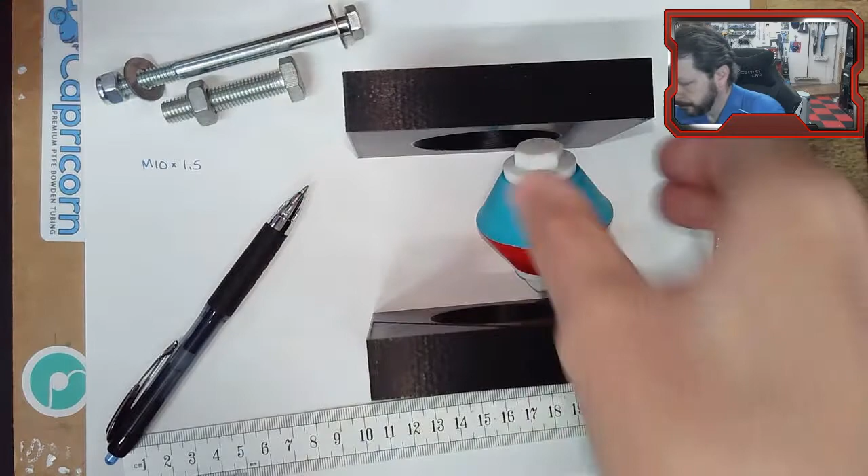Okay, we're going to do an example calculation for calculating the bolt and member stiffness of a bolted joint. We've got a model here of kind of what we're going to do. So we're going to have a top plate and a bottom plate.

This model is demonstrating the frusta that are in the clamped region of the bolted plates. So this is just showing the region that we're going to calculate the spring constant for of the plates themselves. It should also be noted that since these washers are in the grip of the bolt, there's the nut and there's the head, they too are part of this frusta. I just didn't really create the model that way, so this is sort of generalized.

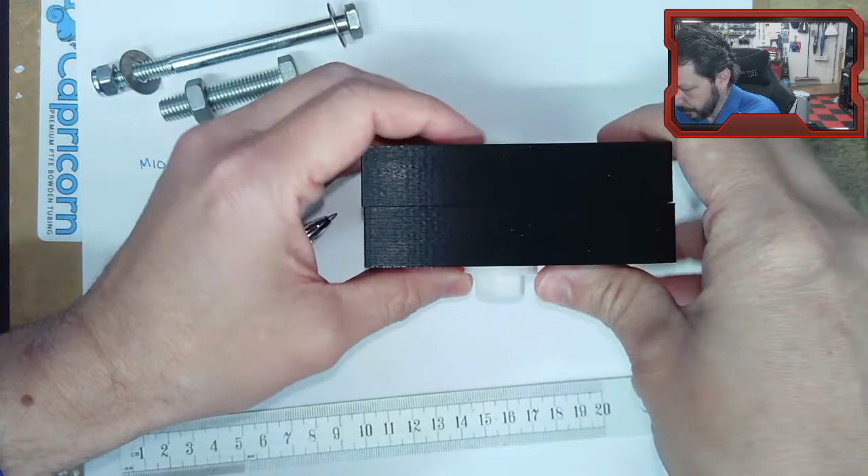So what we're going to do, let's talk about the dimensions of what we're going to model, and then let's go over to Mathcad and build this mathematical model to calculate this stiffness.

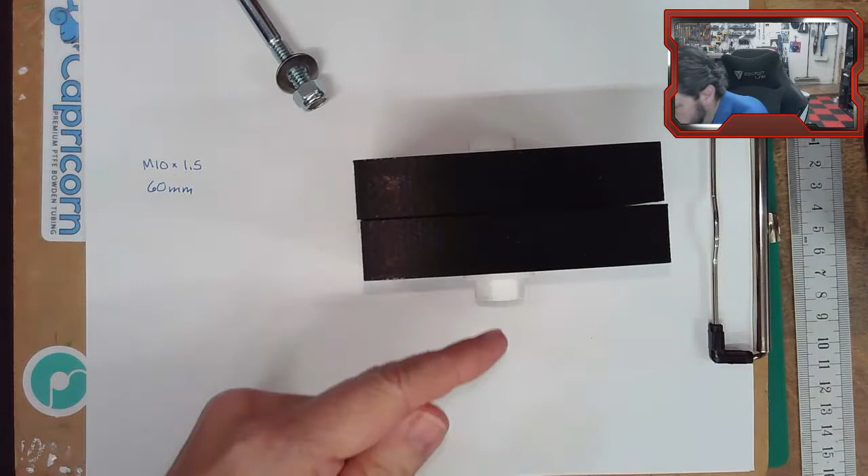I'm going to use a bolt like this one where there's an unthreaded region and a threaded region. Obviously this one's too long for this. What we're going to use is an M10 by 1.5, and it's going to need to be long enough to go through the washer, plate 1, plate 2, the washer on the back side, the nut, and then extend a little bit past the nut, 2 or 3 threads past the nut. If we just measure that total distance, it's going to have to be about 60 millimeters. So it'll be a 60 millimeter long fastener with a few millimeters of threads past the nut.

If you didn't have the physical things to measure, like we can go and measure this, then there are charts that show you the thickness of the various nuts. You can have thin or regular or oversized, so you can have different styles of nuts here that you can calculate, go look up the actual dimensions for.

Same thing for washers, so you could go look up all of those dimensions if you wanted to. We just have it here, so we're just going to measure it. The plates are going to be 20 millimeters thick each.

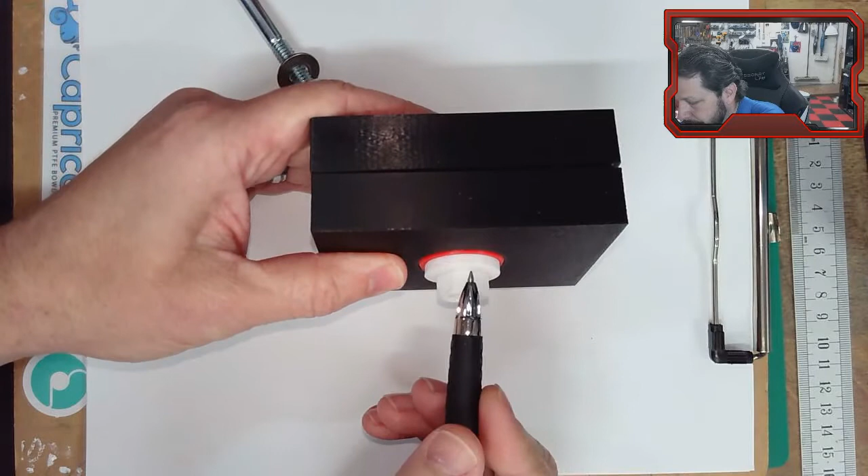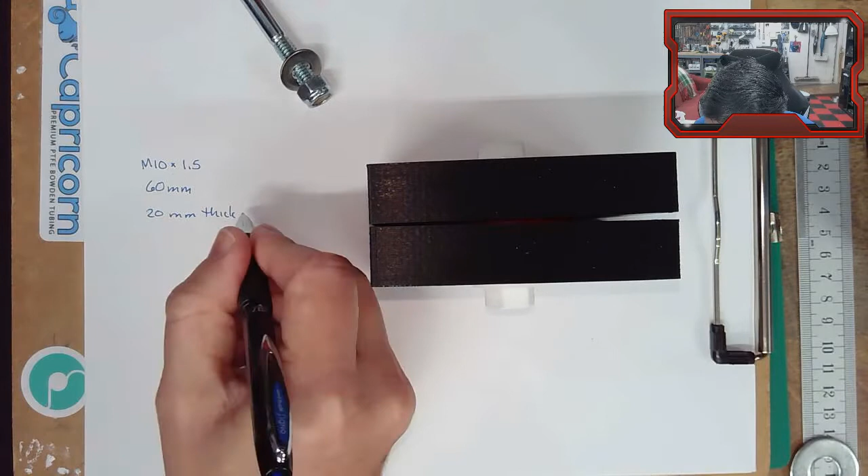And these are thick, oversized washers. I don't know if you can see them too well, but most washers are not nearly that thick. But for demo purposes, here's a big washer here, and it's not that thick at all, an actual real one. But this is 5 millimeters of washer, way more than you normally have, but that's what we're going to go with. So 5 millimeter thick washers.

We're going to go with the washers both being steel, and plate 1 up here, the top plate—kind of get some separation there—the top plate is going to be steel, and we'll make the bottom plate aluminum so that we can see how it affects having different materials.

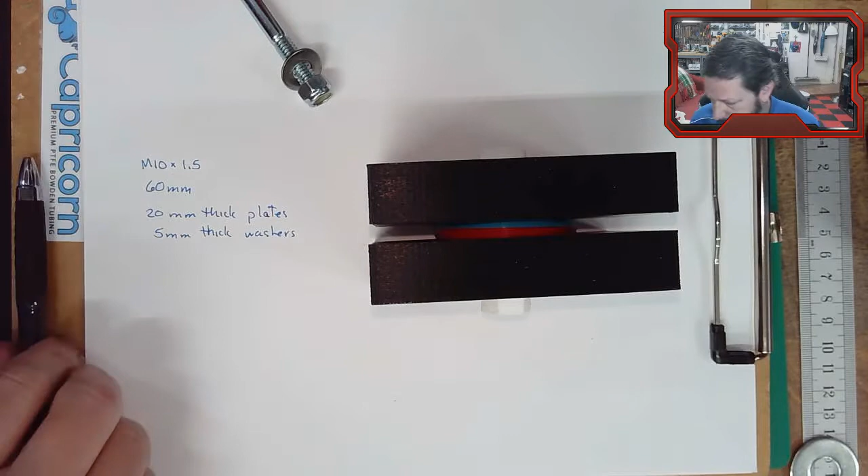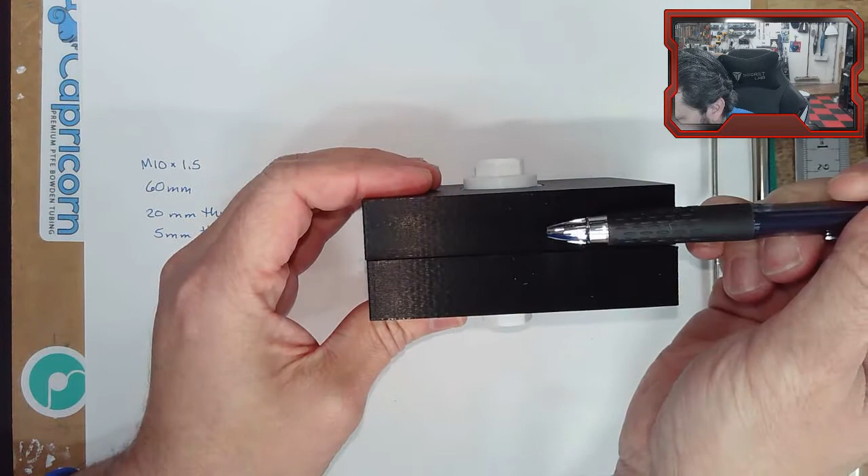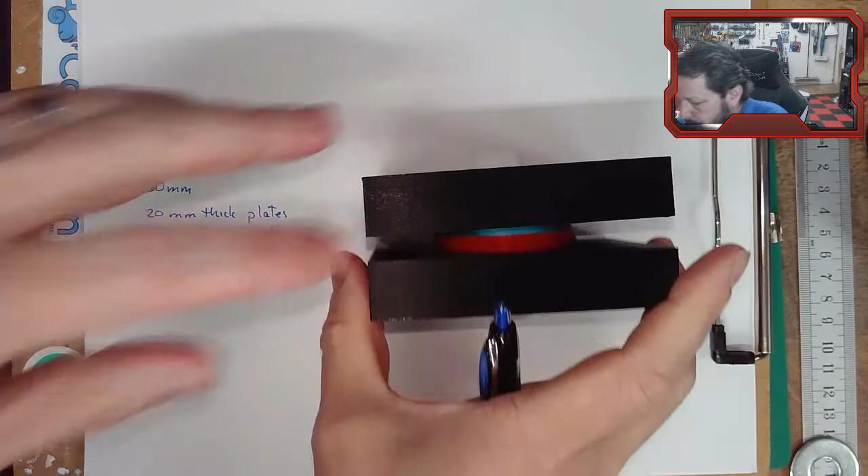So there is one little shortcut that we could take that I'm not going to take, just for the purposes of being a little more thorough on how we're going to do this. Since the steel washer on top and the steel plate are both steel, they have the same modulus of elasticity, and they're touching one another, so they could be part of, in this case, this blue frustum up here—frusta is the plural—they could be collapsed together into one thing of a thickness of 25 millimeters. So we could do that. I'm not going to, just so that we can do one particular calculation on how you get some of these dimensions when you can't do that, like when they're steel and aluminum, you can't mix those together because they're different materials.

Okay, let's go to Mathcad and calculate. First, let's do the bolt stiffness.

And here we've got the equation. Let me look up the actual equation number so you can reference it. This is in Shigley 10th edition. The equation number that we're going to be using is 8-17, so we'll write that down. There we go—well, that's going to actually do math, isn't it? We want to not do math right there, we just want equation 8-17. In 10th edition, that's on page 419.

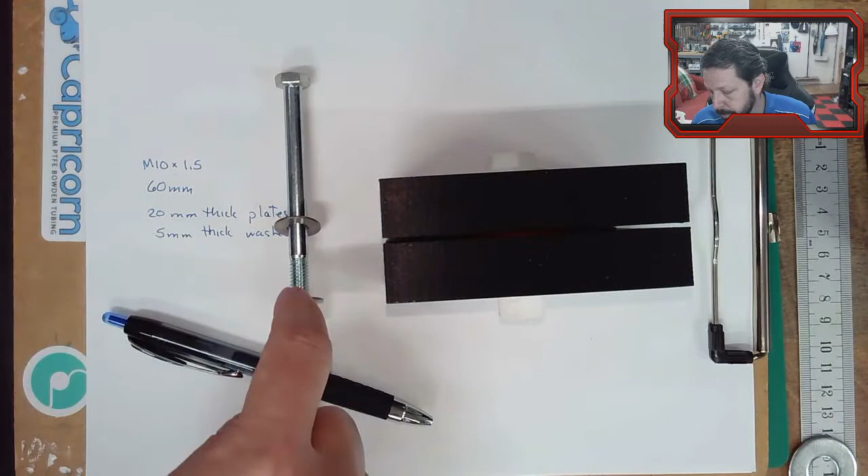This equation is going to need the area of the threaded region, and there's actually a couple of things we need to calculate. The bolt that's actually pictured here is fully threaded, but we're going to model a bolt that has an unthreaded portion and a threaded portion, so that it's more like this, just shorter.

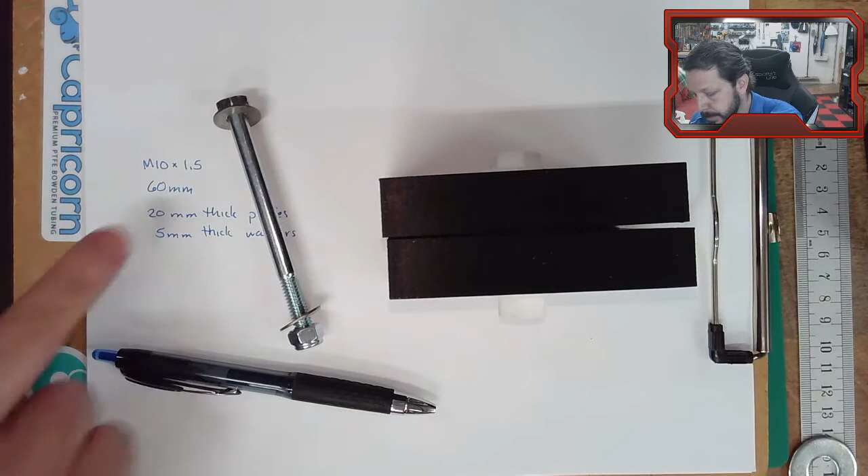We know the total length of the bolt is 60 millimeters. We just measured how far it needed to be. Again, these don't come in easily - they don't come in 62.28 millimeters, so you have to round out to the nearest larger size. If this thing actually measured to need to be 58 millimeters, there's probably not going to be a 58 millimeter bolt that's easy to find, so you round up to 60 millimeters, or the next round size.

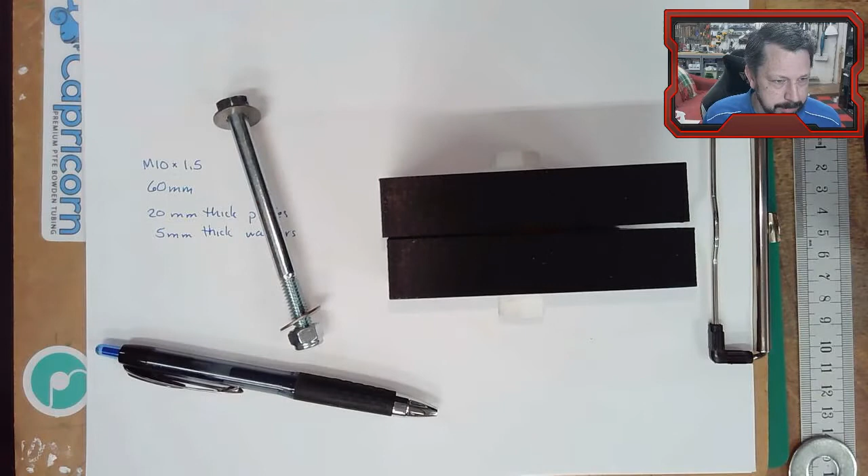In the back of your book on page 1043, there's a table, I think it's A17, that has lists of common sizes for various things. And 60 millimeters, that is a common size. So first, let's get some of these lengths of the threaded versus unthreaded regions.

Let's skip equation 817 for a little bit. L, the total length of the bolt, not including the head of the bolt, is 60 millimeters. And again, this is for an M10 by 1.5, so 10 millimeter diameter - D, lowercase d, is going to be 10 millimeters. We have the length of the threaded portion and the length of the unthreaded portion.

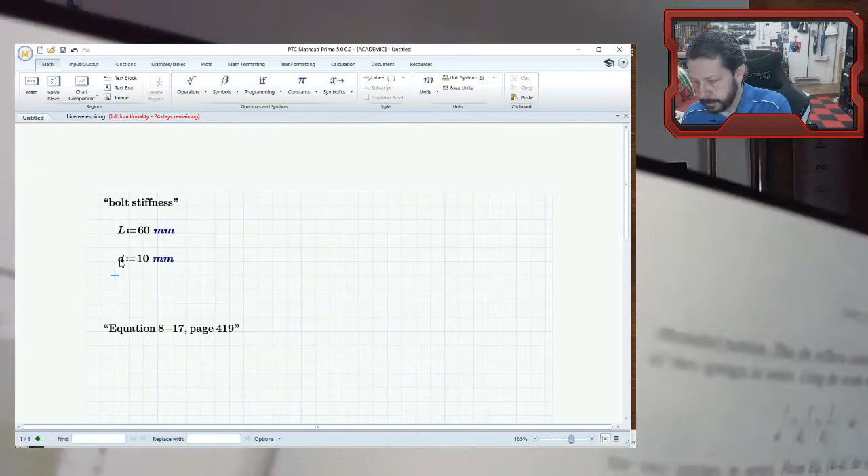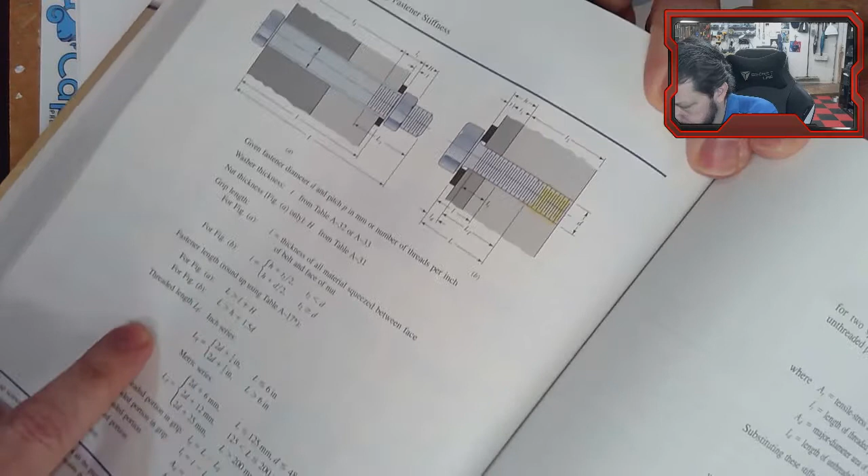It's not a numbered equation, but it's on page 418. I'll show it in the book here. Let's move our samples out of the way. It's right over here, a set of equations - they're kind of crooked, but they're down here. They have the length of the threaded region, and they're based on piecewise functions for either inch or metric.

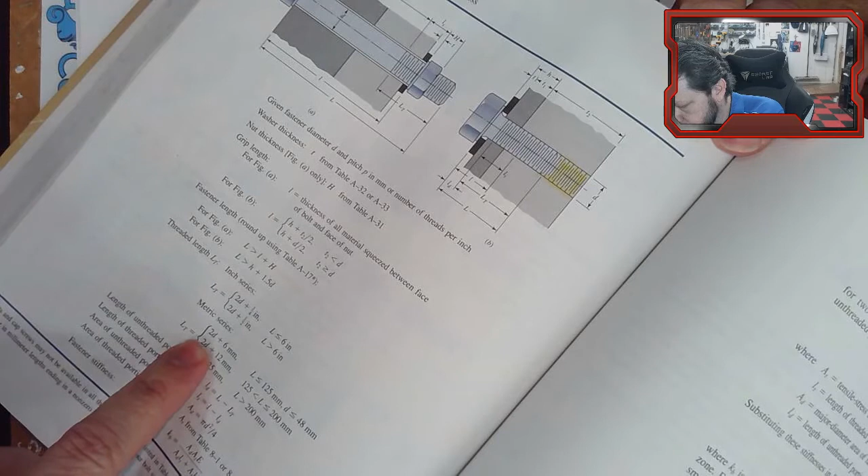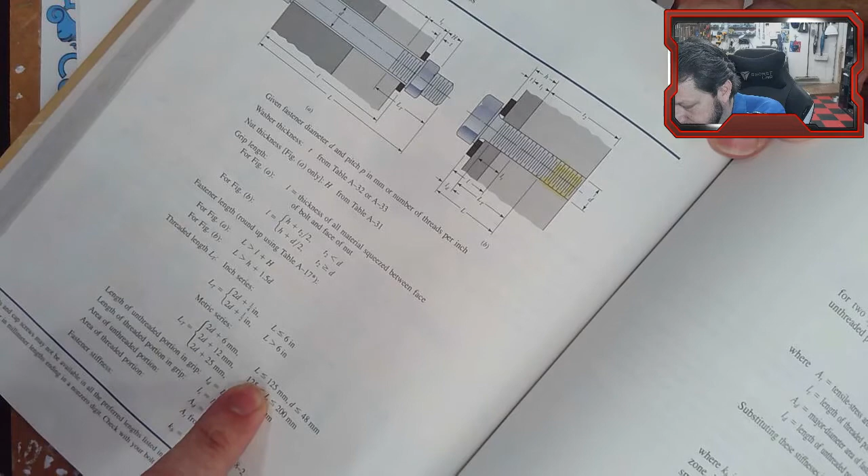We're in the metric series, so ours is 2d, so 2 times the diameter, plus 6 millimeters for a bolt that is both less than 48 millimeters in diameter and 125 millimeters in length. Our bolt fits into that category. So this calculation will give us the length of the threaded portion of the bolt, not the threaded portion in the grip necessarily, but the threaded portion of the bolt.

So that's going to be L, and it's a capital T here for this, kind of to distinguish that it's not necessarily the part that's threaded and in the grip, it's just the threaded part of the bolt. The equation was 2 times the diameter of the bolt plus 6 millimeters, so 26 millimeters. So if that is the length of the threaded portion of the bolt, then here we can have, and they use LD,

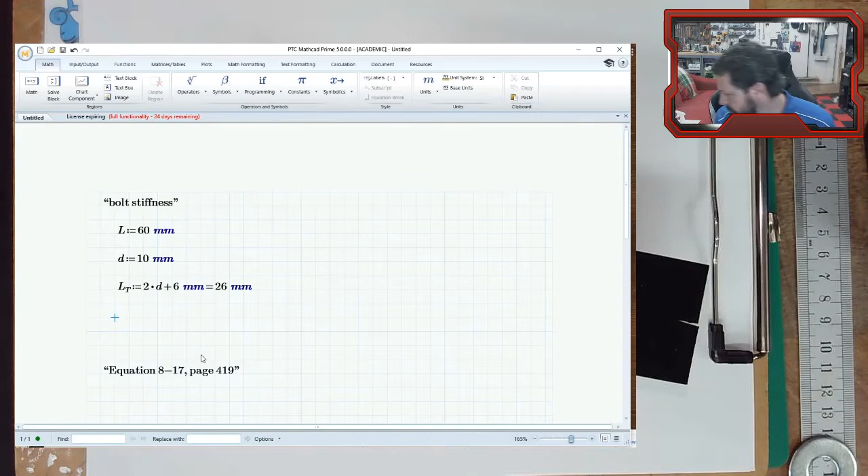Lowercase l's are talking about the part in the grip. The uppercase L's are just talking about the bolt as a whole. So LD, this is the unthreaded portion of the bolt that is in the grip. All of the unthreaded portion should be in the grip - you can't really create the clamping force if it doesn't have threads. So all of the unthreaded is in the grip.

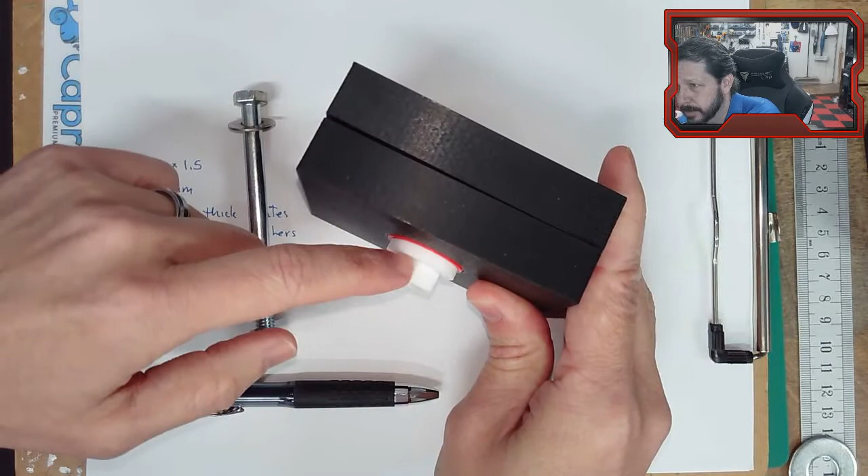So LD would equal the total length of the bolt, which is just L, minus the length of the threaded part of the whole bolt, this number. So 34 millimeters. And so now, we didn't ever actually write it down, but l is the grip. For our setup, everything in the grip is washer, top plate, bottom plate, another washer. I said the washers were 5 millimeters and the plates were 20, so that's a total of 50 millimeters in the grip.

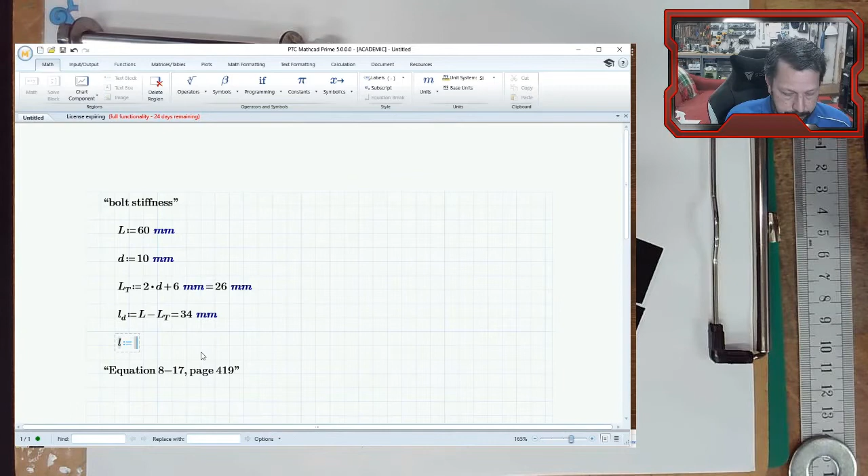So L, lowercase l, the grip is 50 millimeters. Now we've got the length of the threaded portion - well, we have the length of the threaded portion of the entire bolt. We need the length of the threaded portion in the grip. So we have the grip. So let's do length of threaded portion.

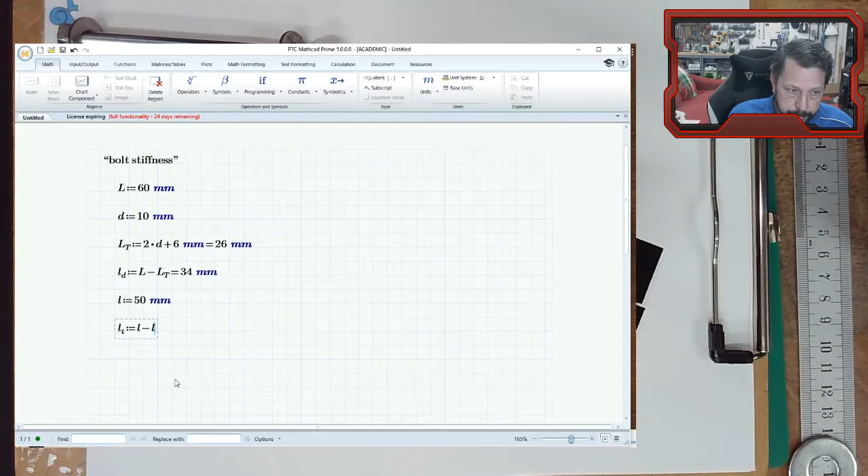Lowercase, meaning that it's in the grip, is equal to the length of the grip minus the length of the unthreaded portion, which is also in the grip. So 16 millimeters of threaded portion in there.

Okay, a couple of other things we need. We need the area of the unthreaded portion, so that is just going to be pi times the diameter of the bolt squared over 4 - just the area of a circle.

I've created it as a function. I don't want that - there we go. Let's put it in millimeters since we have everything else in millimeters.

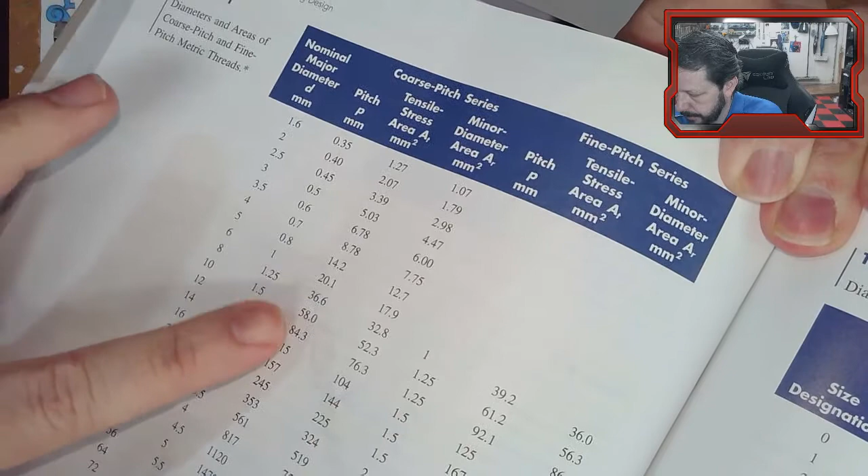We need the area of the threaded portion. This isn't quite a calculation, it's a number we're going to look up in the chart. For our M10 by 1.5, I'm looking at table 8.1. Let's see if we can show it quickly. Table 8.1 over here - we're looking at an M10 1.5 tensile area, 58 millimeters squared.

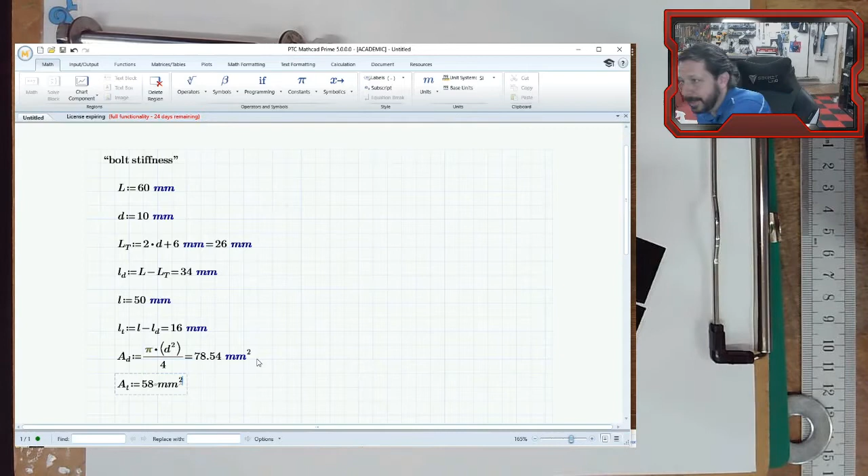Okay, so I don't need that to come up. 58, we're just going to type that in, millimeters squared. All right, at this point I believe we have all of the things. Well, no, one more thing.

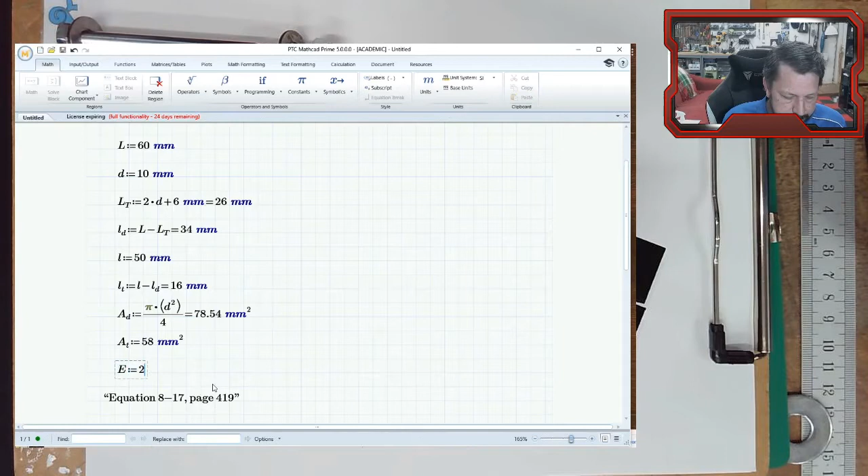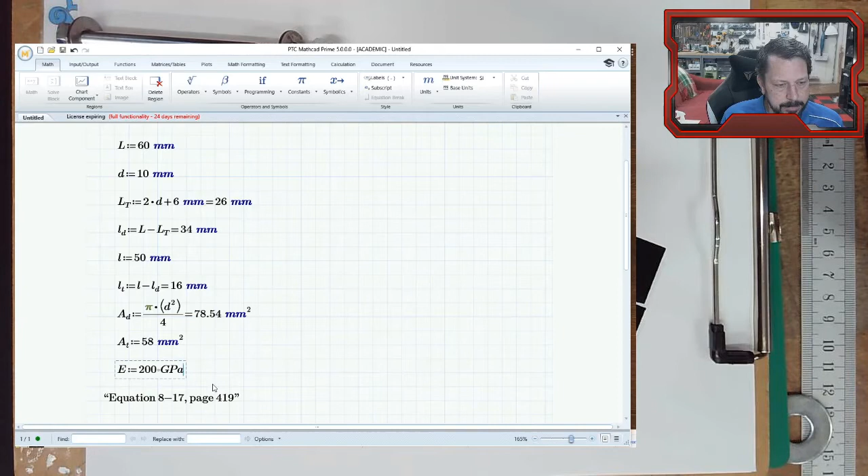We need the modulus of elasticity. This is going to be a steel bolt - modulus of elasticity 200 gigapascals. If you watch the video before this one, where I was doing this live, I put megapascals and the numbers just weren't coming out where I thought they should. It was because it should be gigapascals for steel modulus of elasticity. The units came out a little bit odd - I'm sure that'll happen here too, but we can fix it. It's just the way they displayed it.

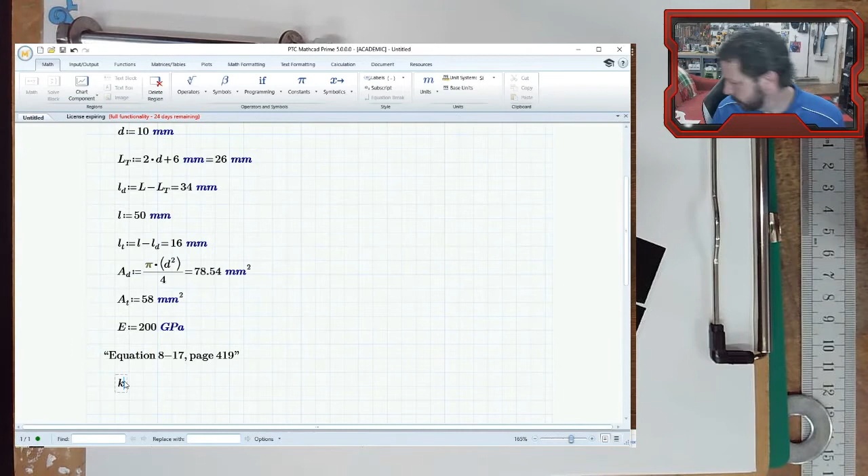All right, so what we want now is bolt stiffness. We can bring this back up - equation 8.17. All of these other equations aren't really numbered, but they're on page 418, I believe - let me make sure about that. Yes, they're on page 418. So all of the equations up here are either things we looked up out of a chart somewhere, like modulus of elasticity, or they're equations on page 418.

All right, bolt stiffness, equation 8.17, is equal to the area of the unthreaded region times the tensile area of the bolt - that's in the threads, which we looked up out of the chart - times E, modulus of elasticity. All of that divided by the area of the unthreaded times the length of the threaded, plus the area of the threaded, so the tensile area, experimentally determined, times the length of the unthreaded.

And it defaults to these kilograms over second squared - we can just change those to newtons per meter. Now we get numbers much more in line with what I was thinking. This should be a pretty high number. This is the spring constant, saying how many newtons it takes to stretch this spring, or compress this spring, which is a bolt, a meter. So it should be a large number.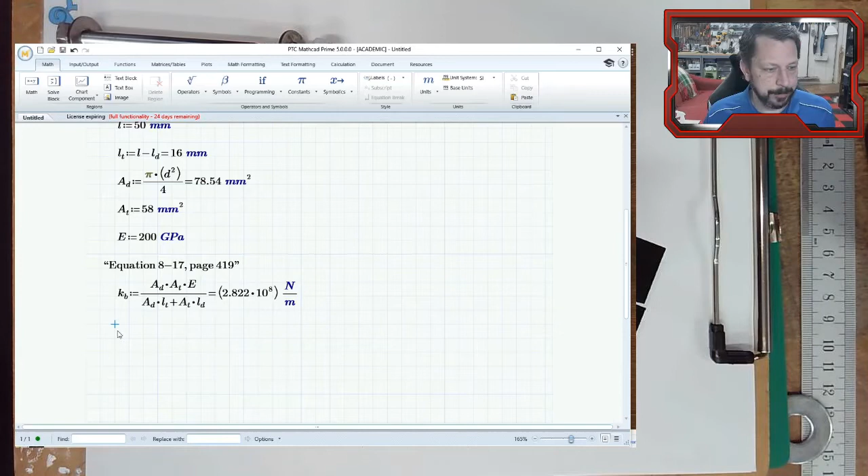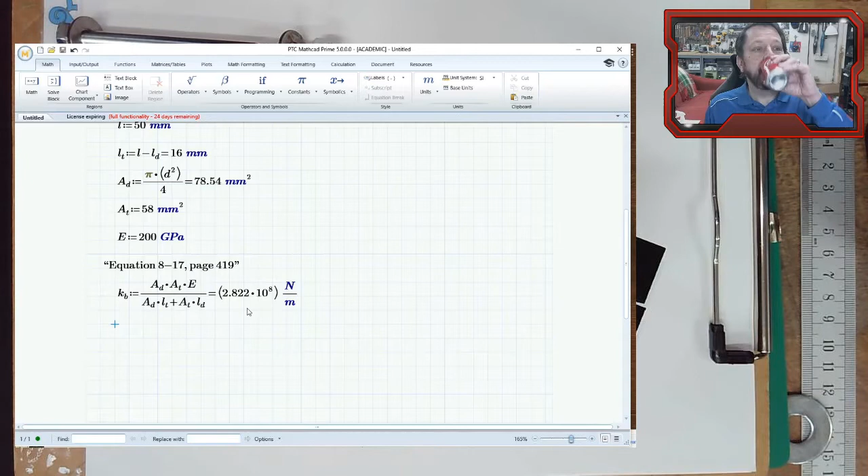Now, you probably can't actually stretch the bolt a meter and still have it intact, but were you able to do that, this would be the amount of force you'd need to do. All right, that's the relatively easy part.

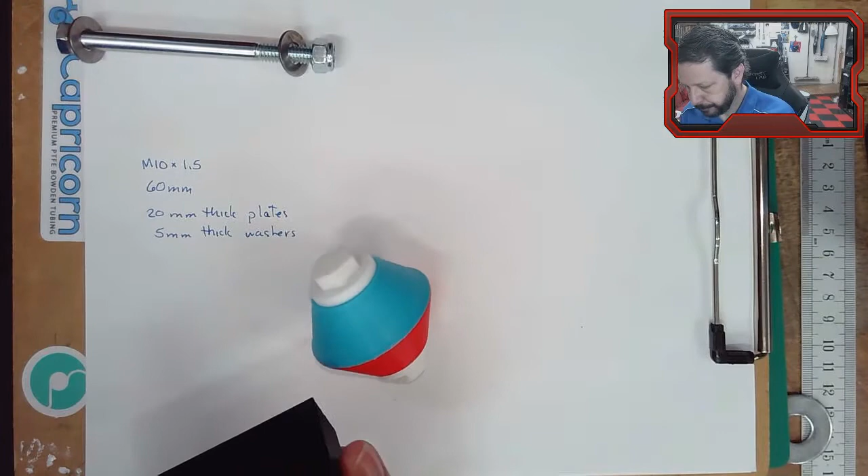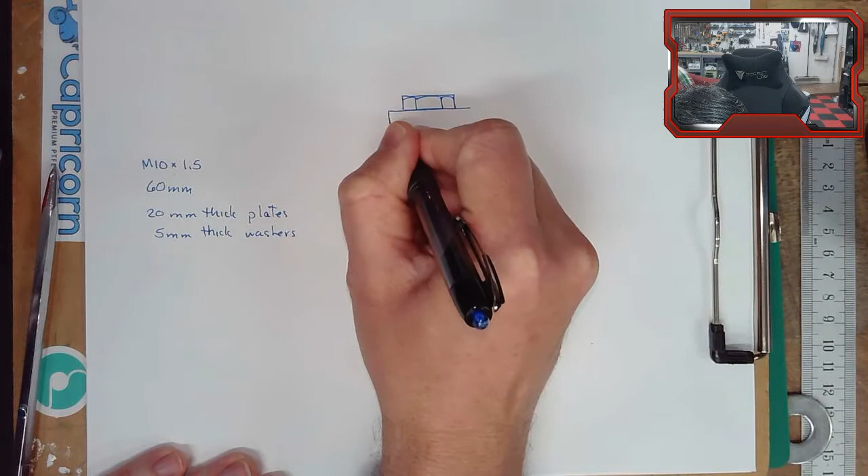Now we need to deal with these parts, these frusta. So it would probably help if we draw out what's going on here so that we can draw these onto our diagram. So we've got the bolt head - the bolt head is not part of the grip, so we don't really have to include it in anything. But then we have this washer down here, and again, I made a really thick washer just so it's visible - but this is the washer.

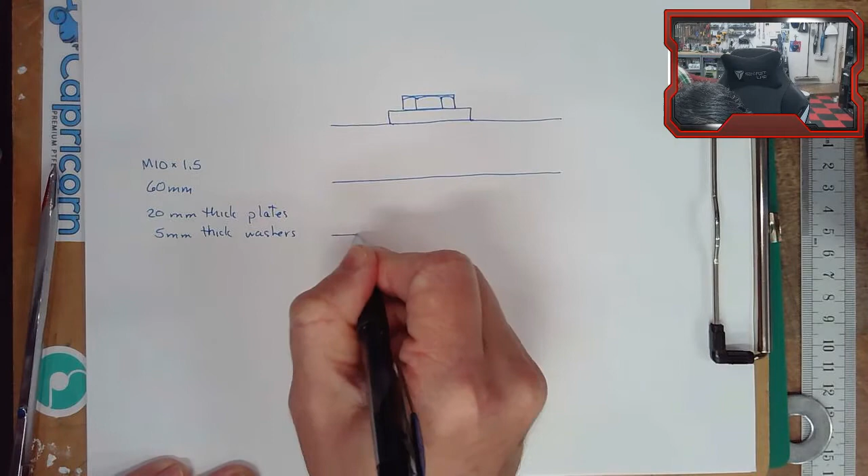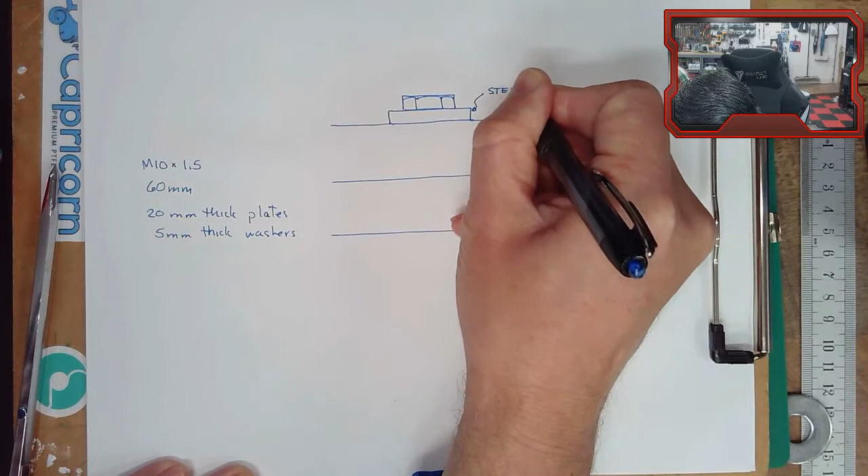Then we've got another washer, steel washer. We're going to make this second plate aluminum, so that we have a different material here. If this was all steel, we could use one of the shortcut equations, even the one that has a curve fit to it, so it's a really simple equation.

Then we've got the nut. The nut is not part of the grip, so I'm going to draw it though. And then there should be a couple of threads past the nut. So this is what we're dealing with.

Hopefully that's not too light and you can see what's going on there. Let's see, I have the frusta. I have blue on top, so let's get a blue. I guess this was blue.

So technically, this is going to start under the bolt head, and this is a 30-degree angle. So that angle is going to be 30 degrees, and it'll do the same thing on the other side.

And it's going to have this slope until it gets to the center of the grip. No matter where this line is, where the two plates meet, it's the center of the grip. So in this case, we have a symmetric one. We'll do another one in another video where it's not symmetric, because that is a slightly more complicated situation. But we'll do one of the calculations that you need for that in here. Once it gets to the center of the grip, it becomes a mirror image. So something like that.